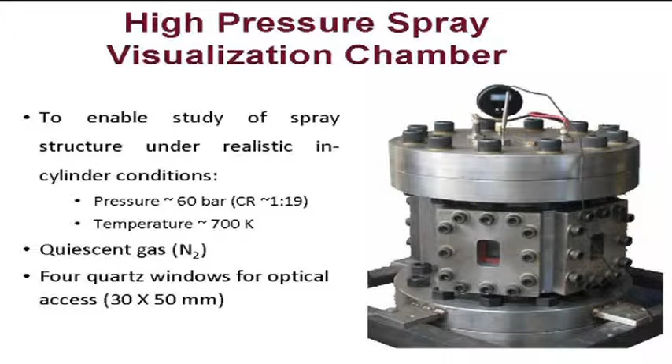This is a high pressure chamber that we have in our laboratory, and we have done some controlled experiments in a quiescent environment, at high pressure and high injection pressure and gas pressure. We have used the PDIA technique. I'm talking about this technique because I'm going to show you some near nozzle images which are of interest, I think, to our community in general, particularly to the community that deals with primary atomization, because I'll show you a couple of images we have recently obtained, which I hope will give us some food for thought.

So Dr. Som earlier talked about the Argonne National X-ray facility, which gives you very detailed information. I'm going to show you something we were able to achieve with a somewhat simpler technique, definitely far simpler than the X-ray technique. This is your standard shadowgraphy, but this technique has been improved over the last several years, primarily with respect to use of high-powered lasers and also long-distance microscope with fairly high resolution cameras. This combination has really helped us probe into the near nozzle structure, and I'm going to show you some images later on.

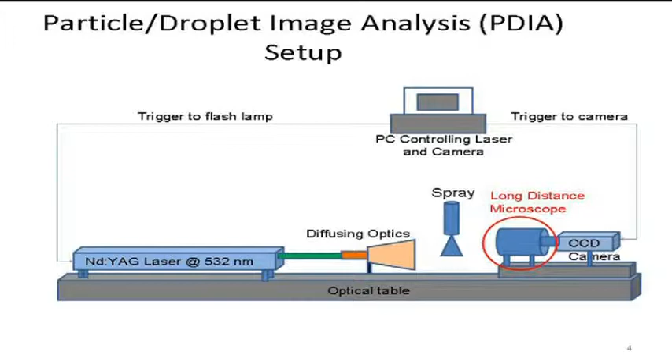Of course, this is just a picture of that. Now, in fact, when we actually started looking at these oils, we found something extremely interesting. This is just a conventional diesel injection image, and when we looked at Jatropha and Pongamia oils—these, by the way, are the plant oils which have not been esterified, so they are not biodiesel, they are the actual original plant oils—we found something extremely strange.

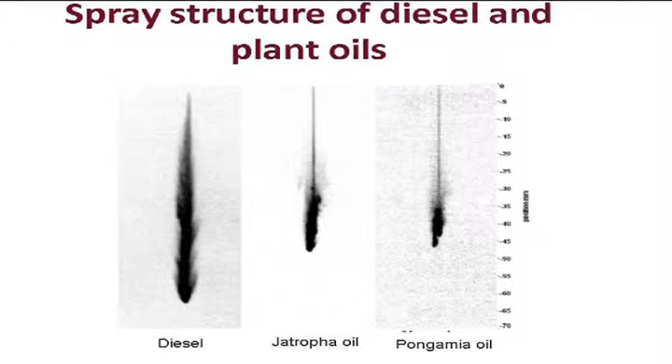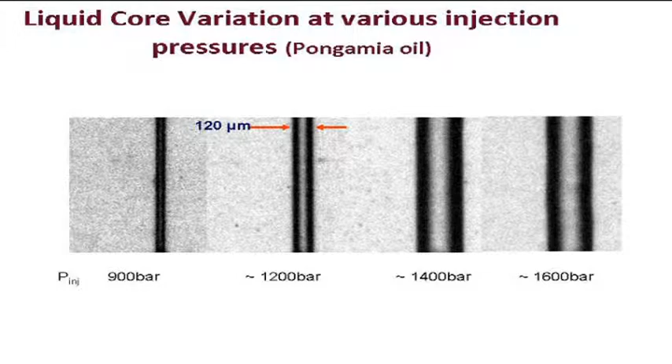Now, these are injections over 1000 bar pressure, and we were really shocked to see almost an intact liquid core when you inject at pressure. Close-up images, as you can see, if you increase the injection pressure to something like 1600 bar, you still actually get an intact liquid core, which really shocked me when I saw that. You just see that the effect of the injection pressure is just to increase the actual diameter of this core, and that just reflects in the higher mass flow.

Now, just to give you a quick idea about the importance of research in biofuels, if you look at the properties, the viscosities are of course pretty high compared to that of diesel.

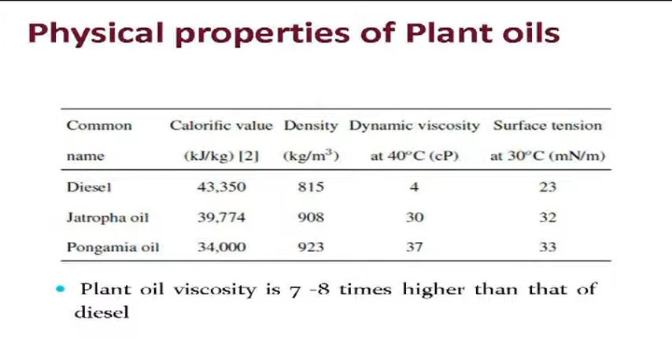They're roughly about 7 to 8 times higher than diesel. But more importantly, I want to show you this diagram. This is a famous diagram plotting Ohnesorge number against Reynolds number, where diesel lies in the atomization regime. If you were to calculate the properties of these oils, you would expect them to lie in the second wind-induced regime. However, what you see experimentally is very different - they don't look as if they lie there.

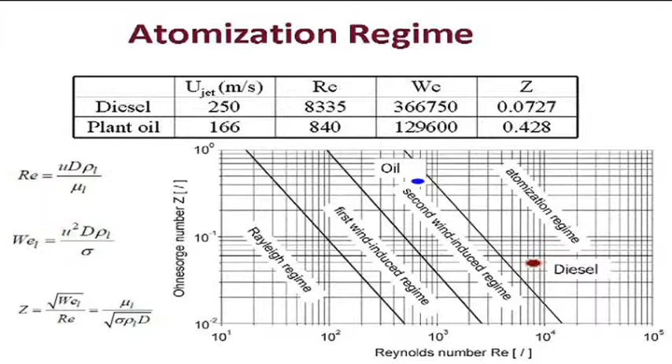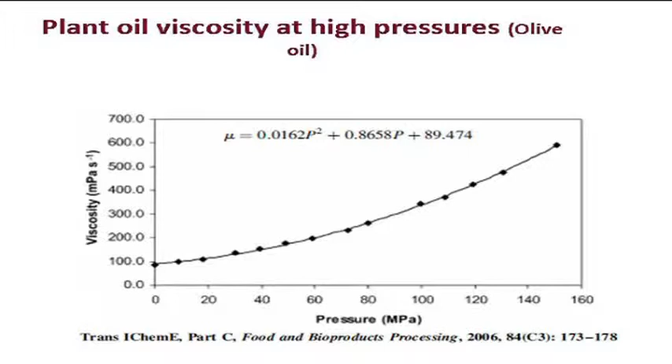That's what made us suspect there must be some non-Newtonian behavior, and this was indeed confirmed. This is from a paper back in 2006 where work on olive oil was done. By the way, these oils are all fairly similar in behavior - the fatty acid compositions are somewhat different, but they tend to behave in a similar way. You see there is a 6-fold increase in viscosity over typical diesel injection pressure. So you go from 0 to about 1400 bar, and there's a 6-fold increase in viscosity of oil.

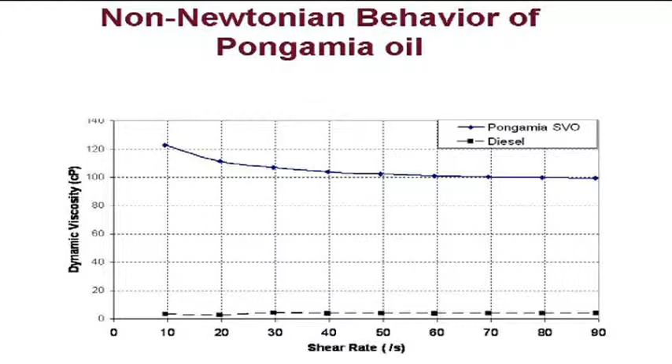When we did a simple experiment with Pongamia oil, which is very similar to Jatropha, we noticed some evidence of non-Newtonian behavior. If you look at the dynamic viscosity versus shear rate, there is a nonlinear variation which tells us that there is non-Newtonian behavior in these oils.

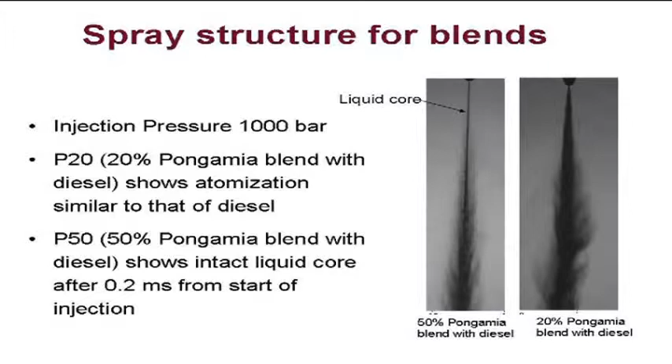It's interesting that when you look at blends - something that will also be of great interest to us, whether it's gasoline or diesel - the spray is significantly affected by the presence of blends. If you have a 50% blend of this non-Newtonian highly viscous oil with diesel, you will see how the core has changed, and it changes drastically as you reduce the amount of oil. These are just pictures for you to keep in mind.

The other important point, raised in the previous session, is how to quantify or detect the presence of ligaments. How do you know there are ligaments, or that there are not spherical droplets? In fact, even in diesel, when we looked at injection pressures into an ambient environment, we do notice the presence of ligaments.

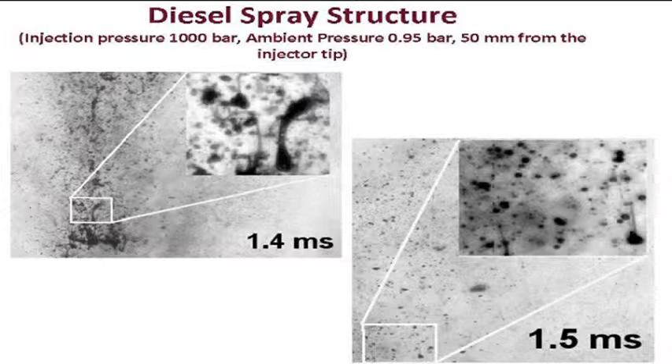Of course, this is a little later because early on in the spray it's so dense that it's impossible to visualize anything. At ambient pressure, things look one way, but if you increase the gas pressure, things do change. I'm just showing you some of these to give you a flavor of some of the issues involved.

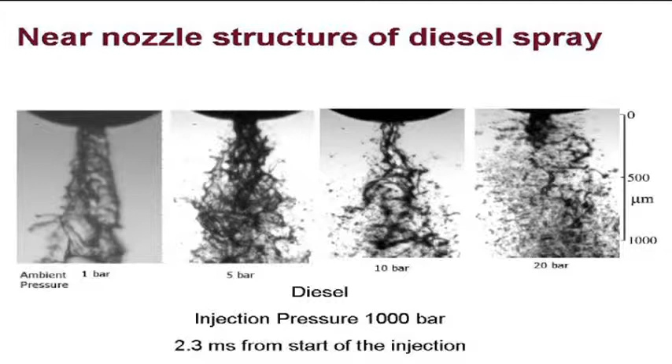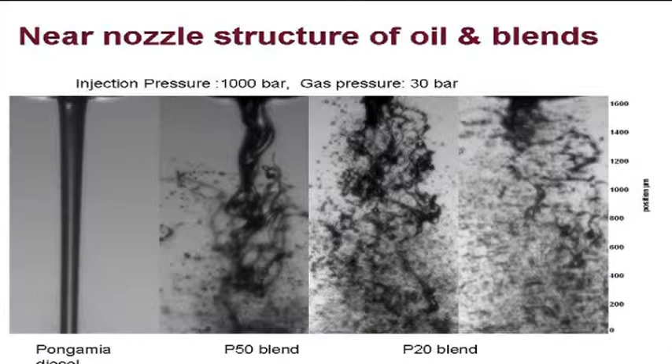This is towards the end of injection, so I won't show those images. But what's more interesting is comparing the so-called Pongamia cases - diesel should be shifted here. So this is Pongamia, this is a 50% blend, 20% blend, and this is diesel. You can see that the effect of the oil has a drastic impact on the atomization structure - there's just an intact core at very high injection pressures.

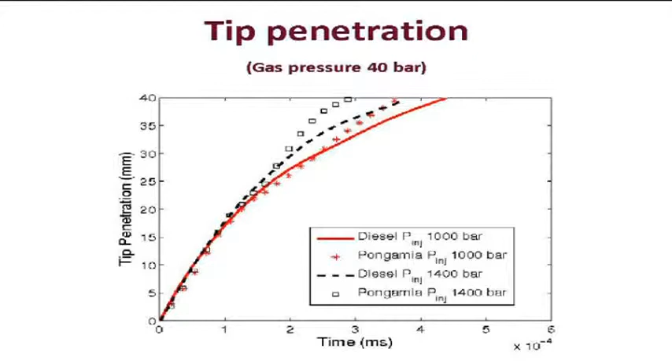I think there is scope for simpler techniques like this, maybe combined with the X-ray technique, to give us better understanding. I'm sure data such as this would help the primary atomization modeling community also. The tip penetration schemes are very different, and I'll skip some of these just to show that there is a need for spray tip correlations also.

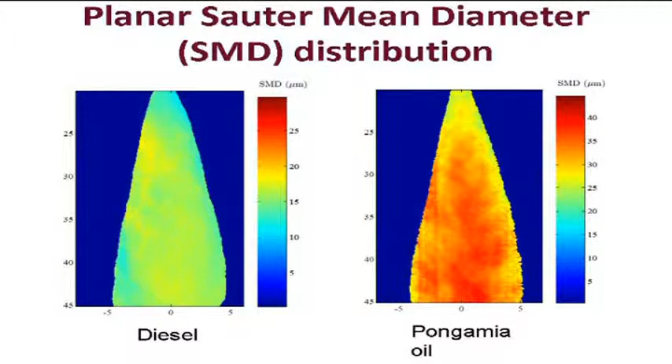This is the Sauter mean diameter distribution from the LSD technique, which many of you are familiar with. I want to present this before discussing the points to be raised. Looking at diesel and Pongamia, or Karanja as it's locally known, the liquid fraction distribution is very different.

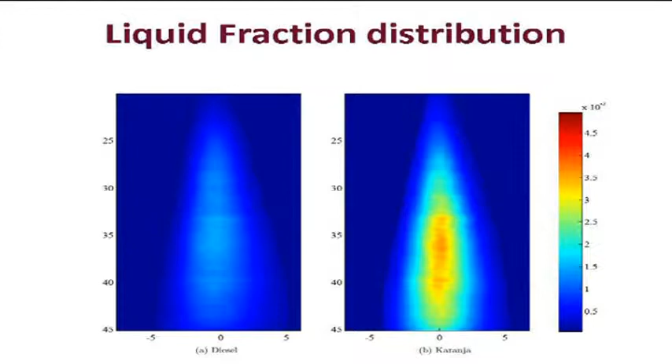This may have an effect on entrainment, and this could lead to some interesting conclusions about what Professor Abraham discussed yesterday regarding the behavior of a gas jet being similar to that of a liquid jet. So if there are fuels with very different properties, these issues could come up. We don't know, these are open issues.

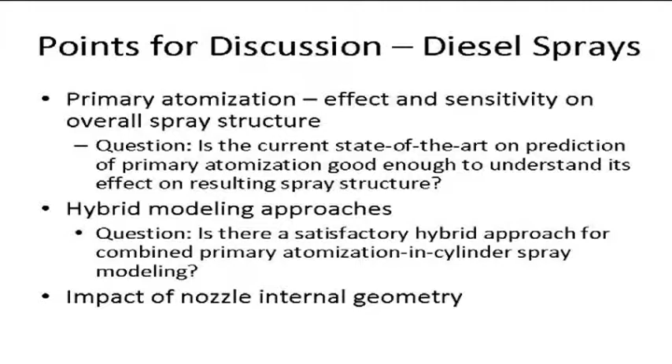So I'll come to the points of discussion now. Primary atomization: what is the effect and how sensitive are the details to the overall spray structure? Is the current state of the art good enough to understand the resulting spray structure? And of more interest to the industrial community, what kind of hybrid modeling approaches are available? Is there a good approach that takes data from primary atomization modeling through LES or other approaches and feeds back into standard arbitrary Lagrangian Eulerian simulations?

And of course, what is the impact of nozzle internal geometry? We had a very interesting talk by Professor Steve Collicott from Purdue yesterday, which gave us a lot of insight about the effect of cavitation. So this is again very important, cavitation and its effect on spray structure.

Professor Jeff Naber mentioned yesterday the challenge of transient events. When you have multiple injections, how does the spray structure behave? How do the droplet sizes change, and so on?

Finally, the effect of fuel properties, about which I've already given a little flavor earlier - what role does it have on spray structure? I took a very extreme example of a highly viscous non-Newtonian oil, but I'm sure these issues are going to be relevant when we look at any biofuel.

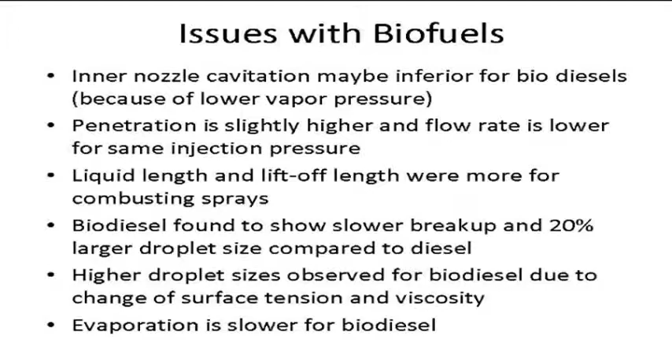Some of the issues with biofuels, in my opinion - and we could have a lot of discussion on this - some of it is from the literature: nozzle cavitation, maybe, I'm not sure whether it will work for biodiesels. The penetration is higher and flow rates are lower for some biodiesels. The liquid length and lift-off length have been reported to be different for combusting sprays. Biodiesel shows slower breakup, with larger droplet sizes reported, and evaporation rates are different.

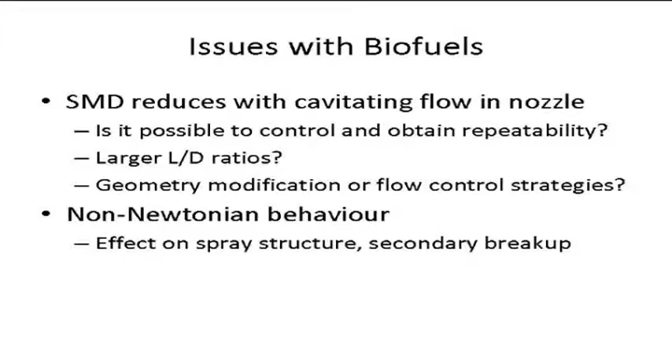But then there are other issues with biofuels, again with respect to nozzle geometry. It's probably desirable to have cavitating flow, but is it possible to control cavitation? Is it possible to obtain a very repeatable spray? This is again very interesting in the context of biofuels.

Could it just be geometry, or could there be some flow control strategies like Professor Stephen Collicott was telling us yesterday? These are open questions. Finally, with biofuels you may have to deal with non-Newtonian behavior. What effect is it going to have on spray structure and secondary breakup? Professor Paul Sojka has been working actively in this area, and it would have been nice to have him here to shed light on this.

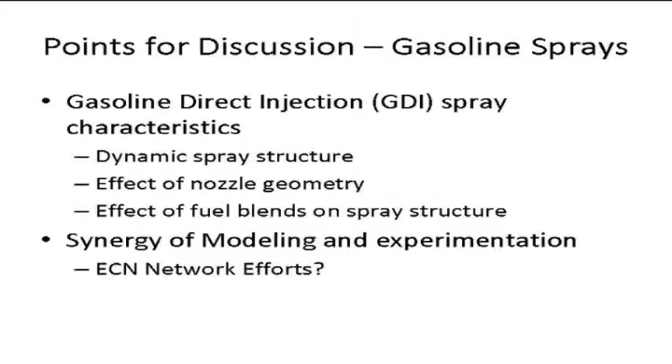Great, that's good. Finally, I'll come to the last slide - points for discussion on gasoline sprays. Professor Naber showed us yesterday the challenges with dealing with GDIs, the dynamic spray structure, and the effect of nozzle geometry, then fuel blends - you have ethanol and other fuels being blended with gasoline. Finally, on gasoline sprays, we have to look for some synergy between modeling and experimentation.

I think there are several people here involved with the ECN. I know Professor Abraham and Dr. Som are all involved - maybe they can shed some light on the efforts of the ECN network and how our community can contribute. With that, I'll stop here, and I'd request Professor John Abraham to comment on these issues or educate us further. Okay, thanks Ravi, those pictures are amazing and very interesting.

Very informative as well, so I'm impressed.

I want to continue by sharing my opinions about spray research in IC engines and its impact on engine development. I keep coming back to this because I worked in industry before going to academia, and I know how people in industry think. As part of my research, I interact closely with several engine companies, and you always have the challenge of convincing them that what you're doing is actually beneficial and useful.

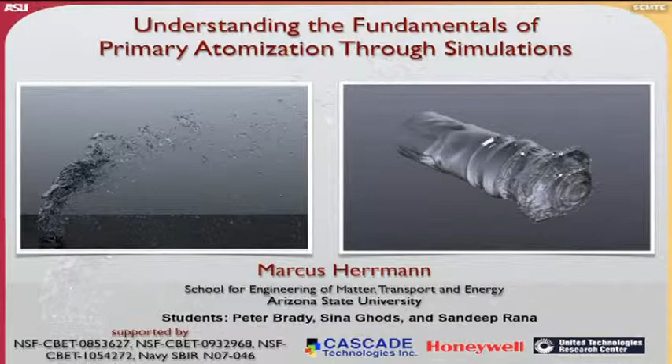Okay, thanks. I was a bit of a last-minute addition to this panel, so I'm just going to have 2 slides, and then I'm just going to talk about some of the issues I think that we still face with simulations. And I'm going to go down into the trenches a little bit and just focus on primary atomization.

And the question is really, do we have a truly predictive model for primary atomization? And I would venture out to say, no, we don't. Because we have models that we typically have to tune. So we need experimental data. We tune our models to that experimental data. And then we can do predictions in between experimental measurement points.

So we can interpolate with some confidence, if I'm so bold to say that, between experimental data that we have. Plus, we have certain models, and we put them in simulation tools that are prone to numerical accuracy issues, as just mentioned. So we're not only tuning our models to the physics, but we're also tuning it to our bad numerical accuracy that we have. So there's an overlap between the two.

So that being said, and having dissed all primary atomization models maybe, the question is, can we do something more? Can we try to predict atomization a little bit from first principle? And that's where detailed simulations come into play.

Now that's at the complete opposite spectrum of computational cost than what industry is looking for in overnight simulations. So you have to think about these more as a numerical experiment and think about experimental time frames of setting up an experiment, running the experiment, repeating the experiment. So we're not talking overnight, we're talking weeks or months in the end.

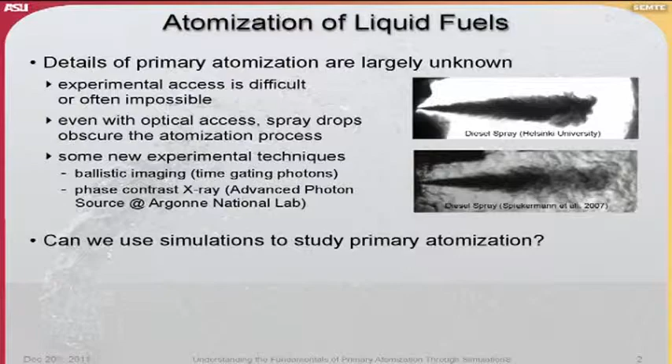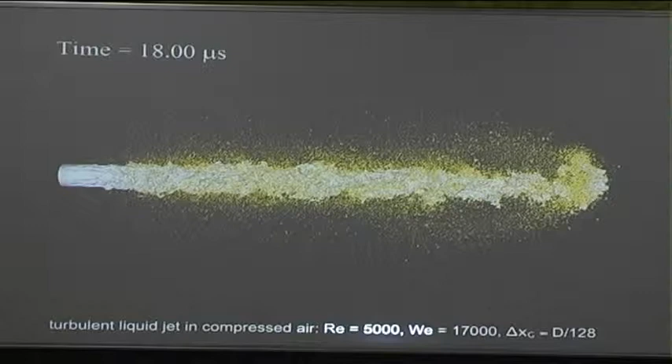So we can try to do these simulations and try to look at the impact of certain properties, of Reynolds number, of Weber number, of turbulence, of liquid turbulence on the actual atomization process.

Now, with those things having been shown, I would say yes, that might be true in the mean, and there was some convincing evidence that it behaves like that in the mean, but what about the fluctuations? What about the variance? What's the impact of fluctuation variance on pollutant production? Is pollutant production dominated by the mean behavior, or is some of the soot formation processes maybe dominated by the fluctuation parts? And how well do I capture these fluctuation parts if I do a pure gas jet approximation? Maybe something to be looked at.

So I wouldn't completely discount these primary atomization, these liquid type models. Then the other thing is, when we do these type of simulations, for the primary atomization part, we're just looking at the very, very near injector part. But the simulation I showed you was 25D diameters in the near injector part. So with a 100 micron nozzle, that's 2.5 millimeters. That's a tiny, tiny fraction of the entire engine, of course.

So we can do these near nozzle flows, and then we have to transition to some Lagrangian description, as we do. And then secondary atomization could kick in, presumably. The question is, how much secondary atomization is actually happening still if you actually do a detailed simulation of the primary atomization?